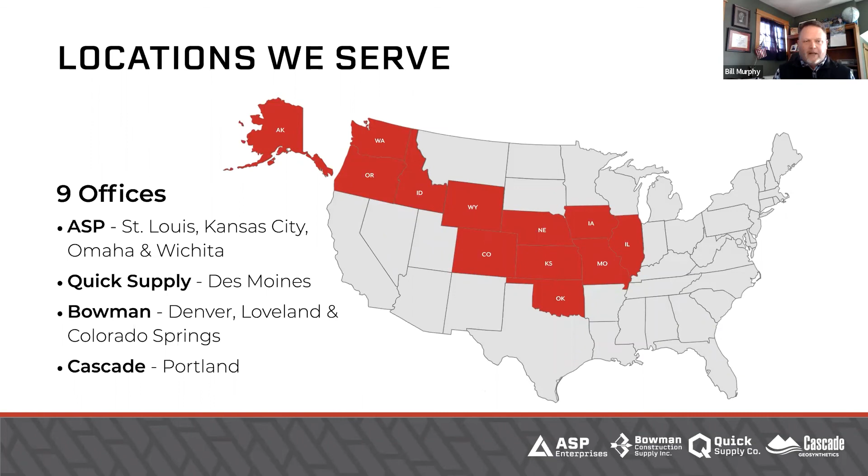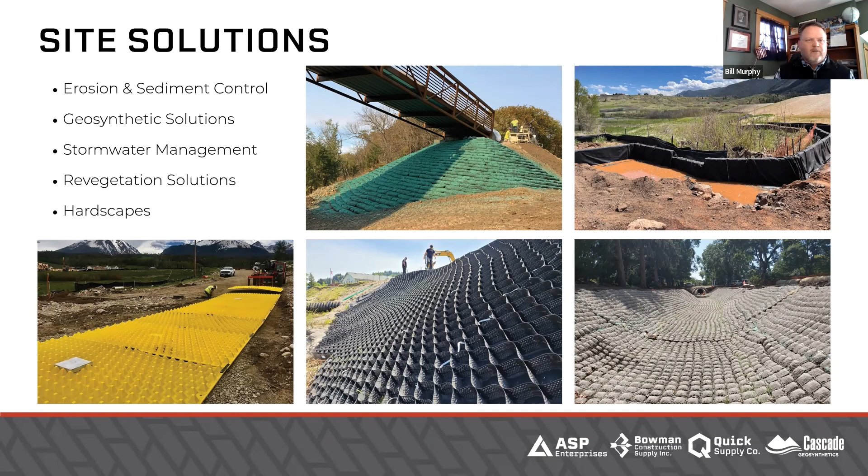We're going to talk about a couple of specific applications today with our guest speaker. But just to remind you folks, if you have questions on any sediment and erosion control, geosynthetics, revegetation, or hardscapes in some of our locations, just give us a call. If we don't have it, we'll point you to somebody who does. We're very good at advice, whether it benefits us that day or not.

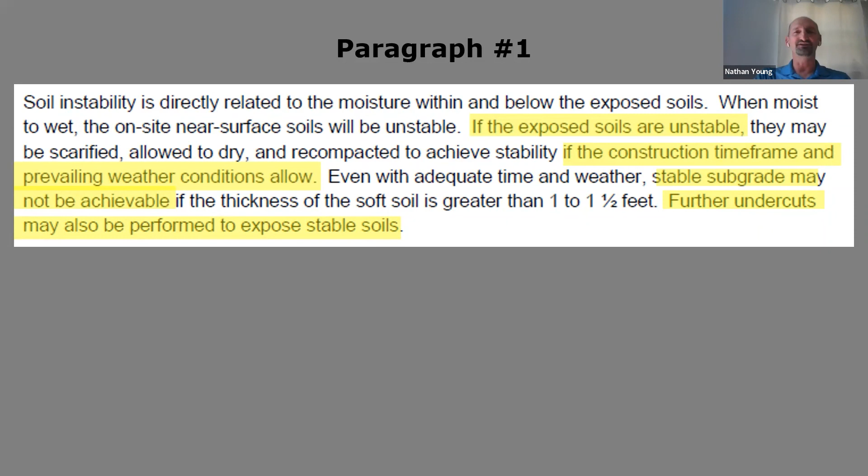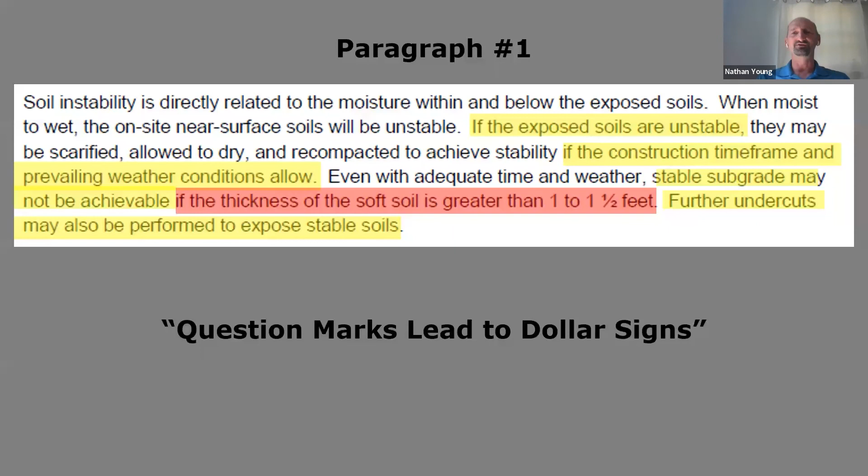I'll break it down by paragraph. If you look at paragraph 1, there's a lot of 'if' - if the exposed soils are unstable, if the construction time... again, that's 'if.' Stable subgrade may not be achievable. Further undercuts may also be performed. So you can see here, there's a lot of uncertainty just in this paragraph alone. And I was told a long time ago that question marks lead to dollar signs - you've probably all heard that, but there are a lot of question marks in this. And then they also throw in this: if the thickness of the soft soil is greater than 1 to 1.5 foot - again, a lot of question marks in that paragraph.

Moving to paragraph 2, for budgeting purposes - and when this is in a report, a lot of times there's a lot of, I don't know if this is a word, but conservativity.

Generally, you get a conservative approach whenever they're asked to provide budgeting purposes. And then the third paragraph, you look here, more detailed recommendations can be provided during construction. And we need to keep the end user in mind when we're looking at these geotech reports.

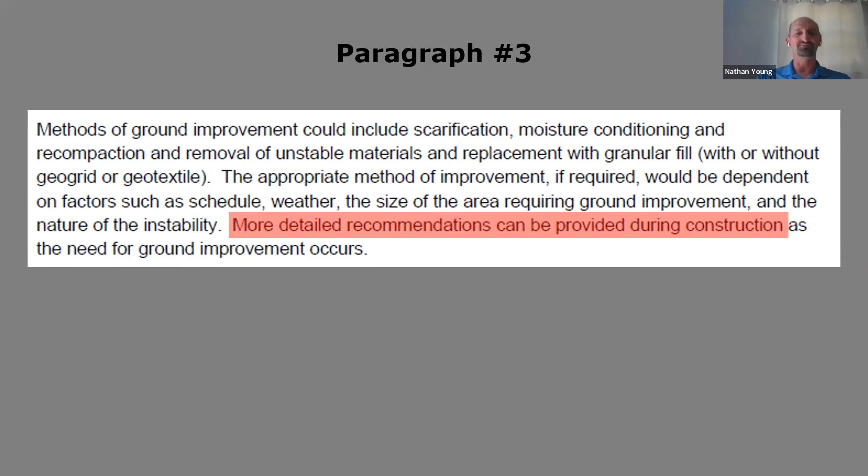Moving on, I blacked out this section because it identifies the company, but here they throw out 2.5 foot undercut depth, bridging lift 24 inches or more. And then this one's a tricky one. The thickness of the bridging lift will depend on site conditions at the time of site grading. So I just quickly broke down that paragraph, and there's some questions.

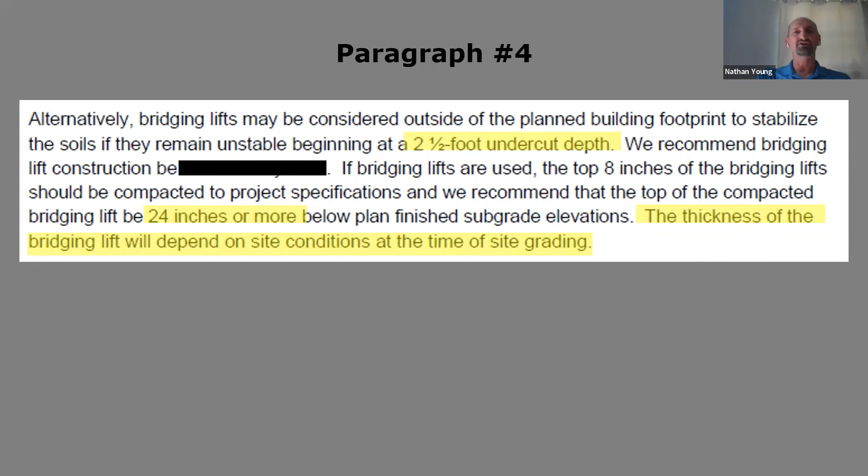First off, how does a contractor bid this project or even provide a budget number with this information? A lot of times you get a conservative budget number, just like the Geotech in this report put out there. They're probably looking at 5 foot undercut. What happens if less undercut is necessary or more undercut is necessary? Well, then it becomes, many of you have seen it, a finger pointing session in the field.

You have either your testing lab, they'll look at it from station to station and come up with a thickness. Well, usually that guy's sitting there with somebody looking over his shoulder, making sure you got it right. Or you have to spend money for a surveyor to come out and shoot actual grades and then put that into a computer program model.

And this one, I never understood this, and this is why it led me to Tensar. I've been designing with Tensar products for over 15 years now, but how do you allow for the benefit of a bridging lift when it comes to supporting the design traffic? In other words, if you have a 2 foot thick lift of bridging material, how many more ESALs does that give you when you're looking at the pavement surface? So that's where Geogrid allows you to calculate that with accuracy.

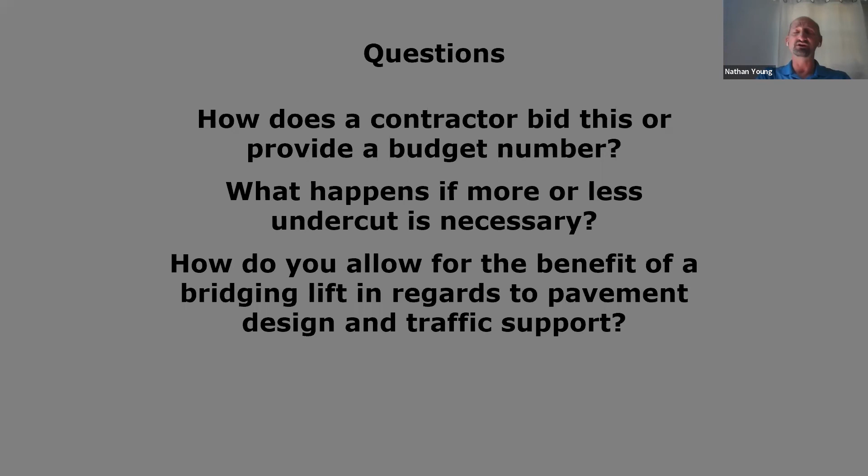Okay, so some of the key terms for today, CBR and subgrade modulus. Basically, those are fancy terms. A lot of you may know them, but it's for the strength of the subgrade. That's the #1 factor for the design input that we look at when we come up with a recommended section. And of course, we'll be talking about primarily Geogrid. And then another key term is performance. Within all families of geosynthetics, whether it's fabric, asphalt reinforcement, Geogrid, there's differing levels of performance within each product.

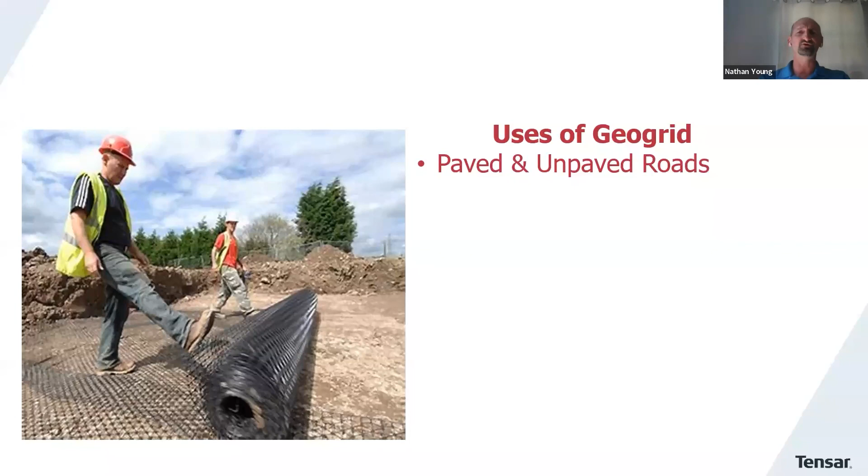So a lot of you probably know these uses of Geogrid, but I'll just run through them real quick. Paved and unpaved roads, access or haul roads. Maybe you just need to get out to the site to be able to build it, and it may be a temporary haul road. Shallow utility cover, in a lot of areas we're seeing a lot of sprawl. So we're going into areas where we have old buildings and we're demoing the buildings. Well, then you have a spider web of shallow utilities. So it allows you to not have to undercut or reroute utilities.

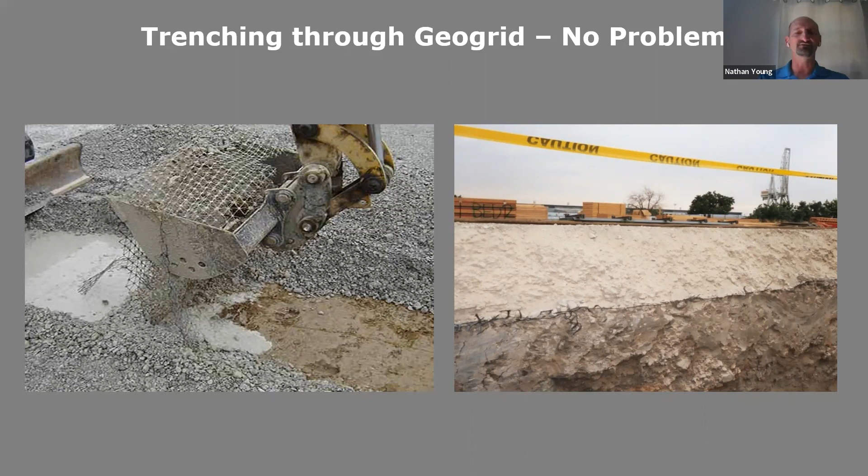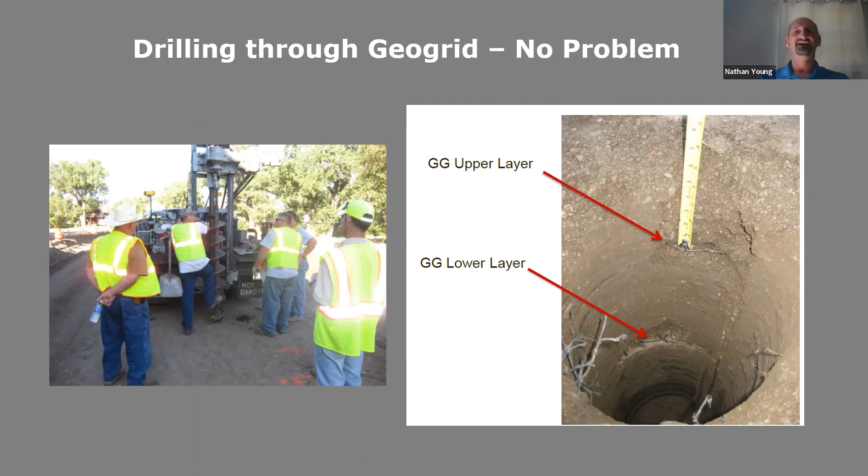Which leads me to the most common question that I'm asked: well, what if we have the grid down? What do we do? Well, you can trench right through it. You don't need any special heavy equipment or to remove some of the gravel and hand cut it. You just take your backhoe or track hoe and just excavate through the grid. And you can actually drill through it. We partner with GeoPier on a lot of projects where they just need a platform to drill through and install their GeoPier system. And you can actually drill through our grid as well.

So moving on, soft soil conditions, which is the reason Geogrid was invented originally back in the late 60s and 70s. We have a lot of rail applications, working platforms if it's a crane platform, bridge abutments. We have walls and slopes, reinforced slopes, and all of these above.

Tensar has people in place such as me. That's what we're here to do, is to help you come up with a design recommendation, whether it's before construction or during construction, and we can help you out with that. And then the number one reason for geogrid is to generate some construction cost and time savings.

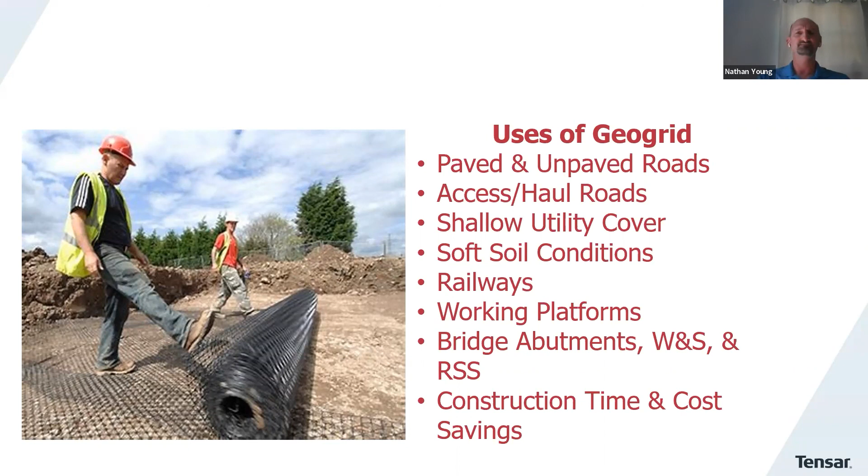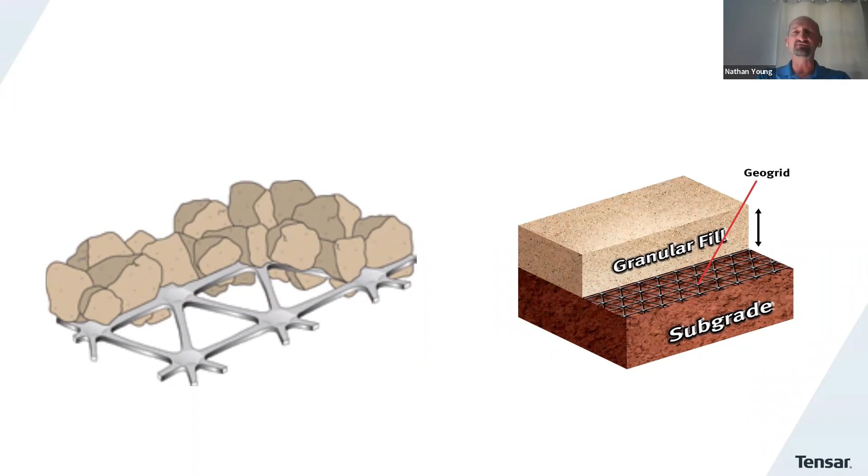And just basically how it works, the aggregate or the rock sticks through the openings in the grid, which puts the grid into tension and distributes the load over a soft subgrade. And it's placed on the subgrade. The subgrade has to be relatively flat. It doesn't need to be perfectly rolled. Any track hoe operator, while you're doing your clearing and grubbing, can get it flat enough for our purposes.

So I mentioned performance as one of the key terms for today. And in order to discuss performance, I think the easiest way is to go through the history of geogrid and the performance of geogrids. The geogrids I'll talk about, Tensar's grids, are all made in the USA. They're down in Morrow, Georgia, just outside of Atlanta.

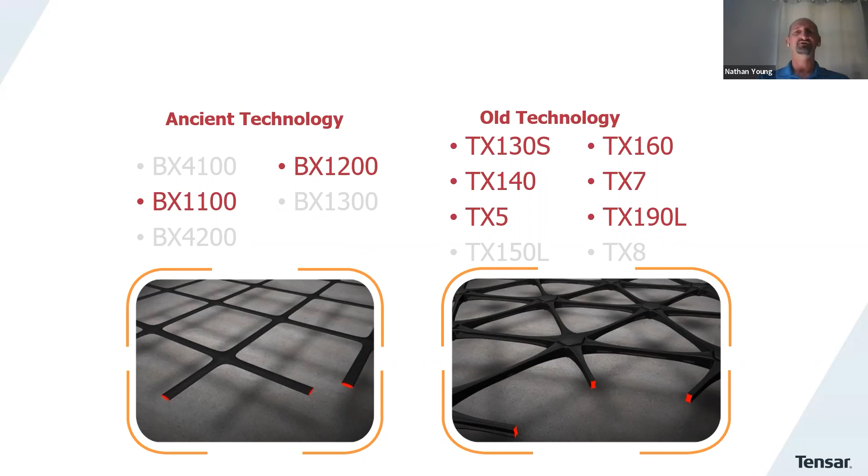So I have on the left-hand side ancient technology, I call it, and then on the right-hand side, now old technology. And the ones in red are kind of the go-to. So in the ancient technology, these are the biaxial geogrids, the BX1100, BX1200. And then what I'm calling old technology are the triaxial geogrids. And as you can see, those are kind of the go-tos, the ones highlighted in red.

And the difference between the two: the biaxial geogrids, referred to as biax, were developed to distribute loads, and because of the alignment of the apertures and the nodes, they transfer loads linearly. Whereas triaxial geogrids, you put a group of triangles together, 6 triangles create a hexagon, which allows you to distribute loads radially in a 360-degree pattern.

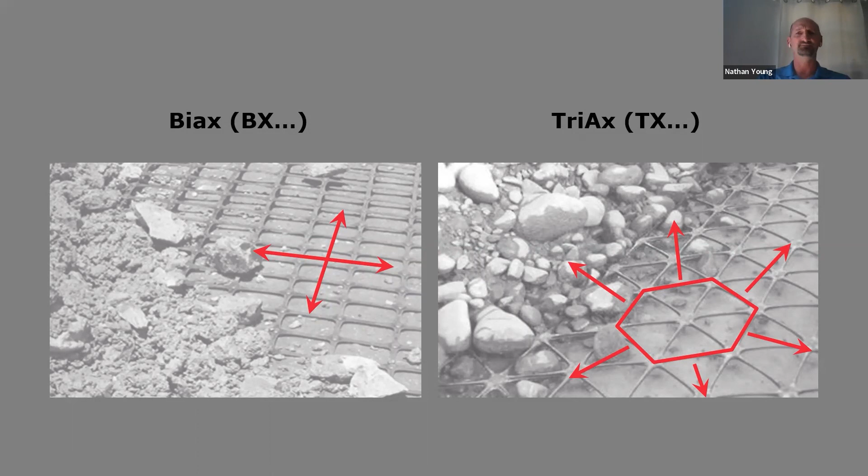Oh, and I forgot I have a sample here. Before we move on, this is the triaxial geogrid. Many of you may have seen it, polypropylene. And again, the 6 triangles create the hexagon. And also to be noted, there are 2 additional legs to each node as opposed to biaxial grid.

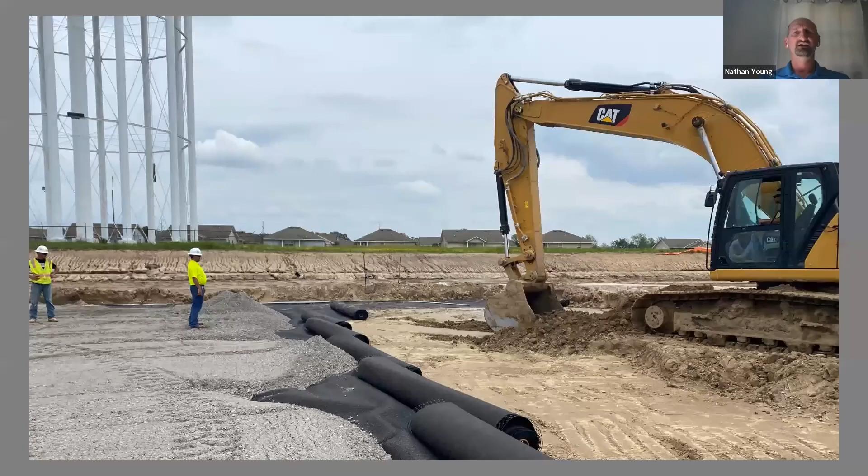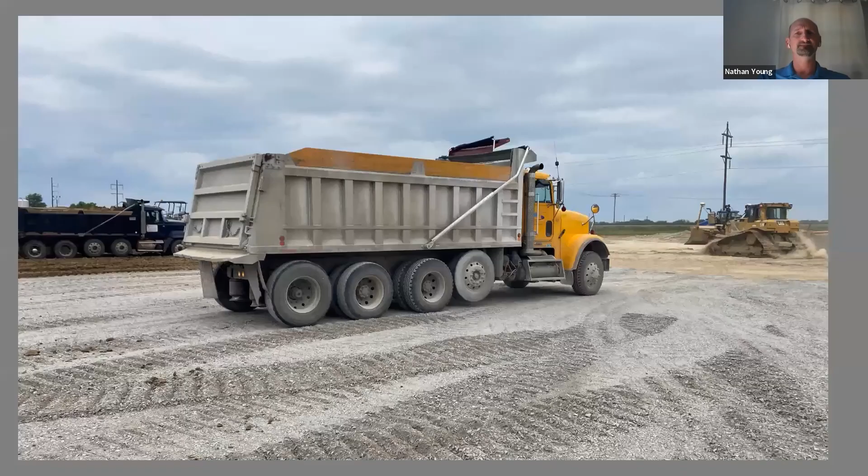And here you can see the rolls; it looks just like a geotextile fabric. Contractors like this because it's one application. You don't have to carry around the heavy rolls of fabric with a skid steer or track hoe. One person on each end of this roll, you can lift it, place it, and then kick it out and install your gravel. And here you can see we were able to build on it.

And then the newest is InterAx geogrid. We saw that the hexagon shape really worked well, and from what I understand, there were nearly 100 different iterations of this grid. But we have a floating hexagon, which is just a little bit thinner than the outer hexagon. It allows for a broader spectrum of aggregate sizes. Like the triaxial geogrid, we have anywhere from TX130 to TX190, and the difference in those is primarily the shape of the opening to accommodate different aggregate sizes, whereas InterAx has a broader range.

And this is the InterAx, and I'm hoping you can see here, it has a white outer coating and the standard polypropylene black on the inside. And the reason for that is the white coating, if you push hard enough and you have a hard enough thumbnail, you can slightly indent this white coating. And this is co-extruded, so it's not going to separate.

But what that does is it allows for more of a locked-in, mechanically stabilized rock layer. So you're looking at performance. The spectrum is from left to right here. Left is unstabilized, which is before we had any geogrid. Then we have the biaxial geogrid that was invented in the late 70s, but 84 is when we really started honing in on our design methodologies. Triaxial geogrid was in 07, and then our InterAx is in 21.

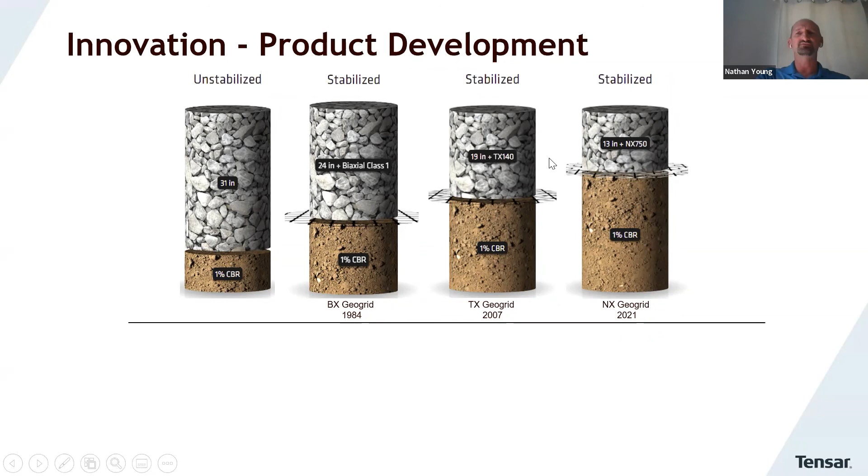So if you look at it as far as communications, back before we had grid, we had the carrier pigeon. And I like to call this, in 84, the Zach Morris phone came out, and that'll age a lot of folks, but Saved by the Bell, Zach Morris, he was cool because he had this big old brick phone.

My wife will get a kick out of that one. I'll have to let her know.

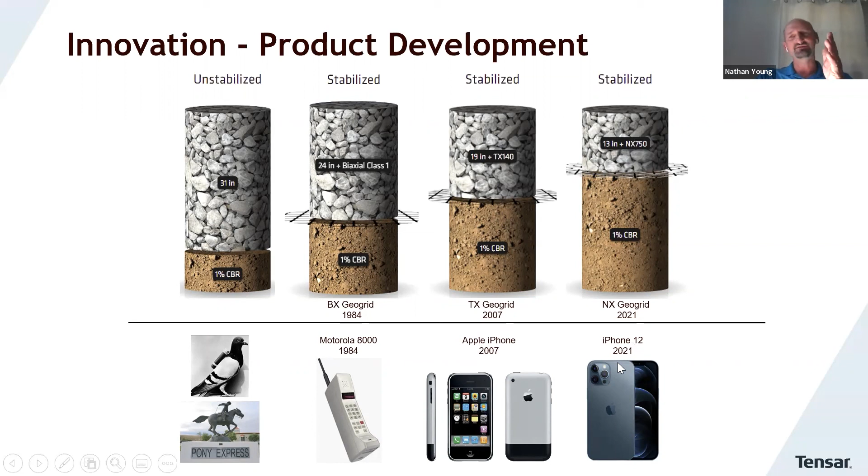Yeah. And then in 07, Apple came out with the iPhone, which I swore would not fly because I knew I would probably break the screen. But here we all, 90% of people have iPhones. And then in 21, we had the iPhone 12 come out. So that kind of aligns it with the technology of communications.

A couple of public service announcements, I call this my public service announcement section. I see this a lot in Kansas and Missouri, where there's highway plans that come out and they just say geogrid. And whenever I call the designer, I ask them, what were we doing here? What type of grid, and what was your approach? Well, they say, we have a qualified products list or an approved products list, and they pick the geogrid off of that.

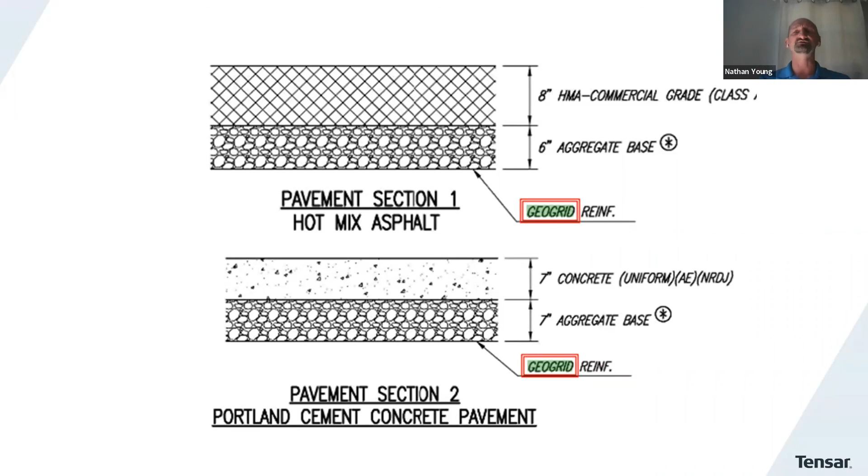Well, most of the time when you're bidding a job, the contractors, in order to get a competitive advantage, will pick the cheapest geogrid. Well, that also means that it's the lowest performing geogrid. So they say, well, we're stuck with that or-equal clause.

Well, back in 2019, FHWA stepped out and said, we're going to allow you to spec proprietary products. In other words, in your plans, you can call out InterAx NX850 or whatever the case may be. And then beyond that, back in 74, there's a court case where they wanted to allow for specing proprietary products. Well, I was actually at a presentation when this came up, and I don't know the date, but apparently several weeks ago, it's fairly recent, the Supreme Court actually backed that up. So at the highest level, it is actually allowed.

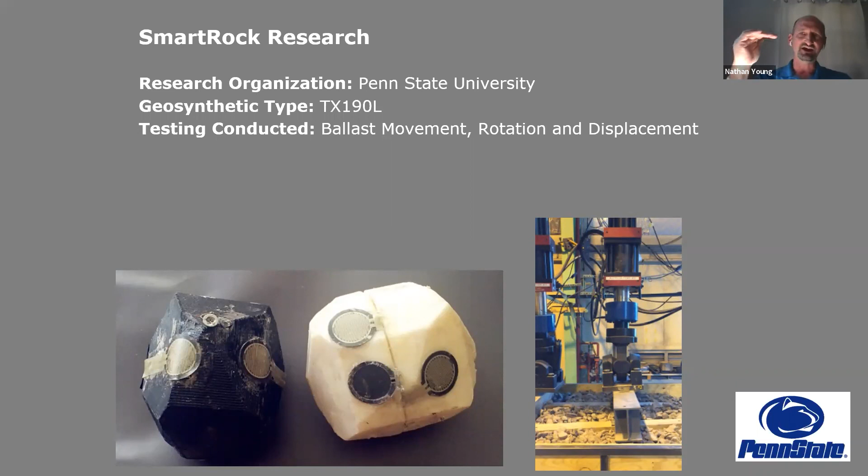And just to give you an idea on the level of research, this was a smart rock. We partnered with Penn State in developing this smart rock. Basically, it was put in the middle of a railroad ballast, and it would record the rotation and the movement of that smart rock within that section as trains would go over the rail.

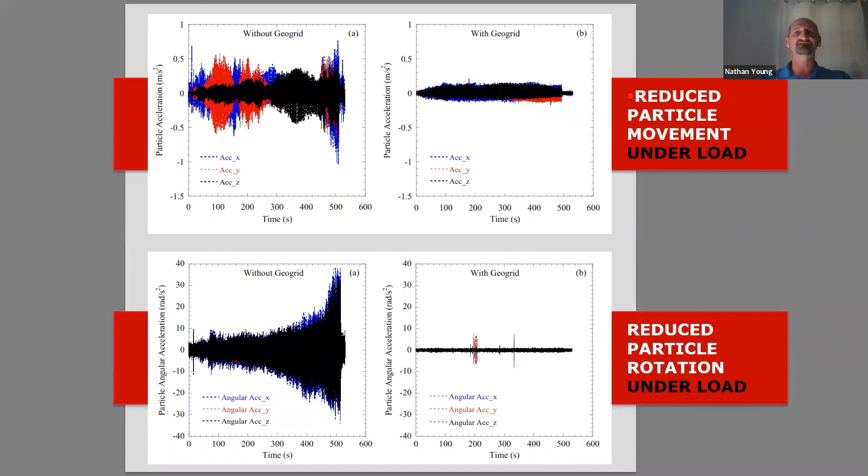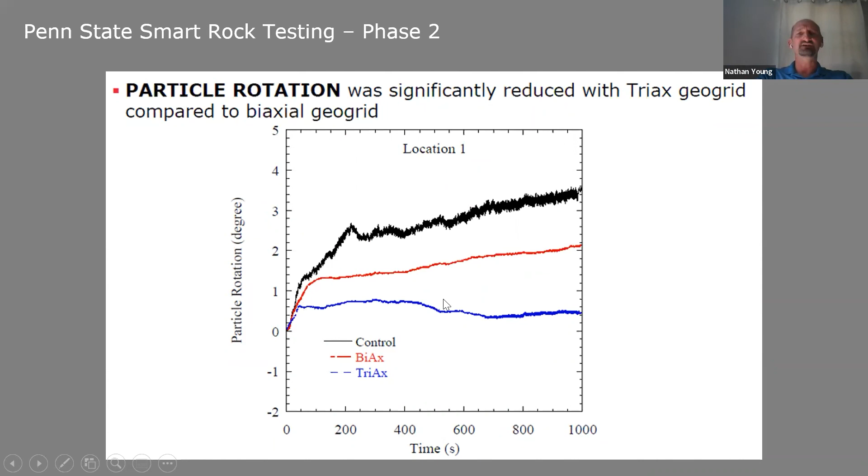Here's the output. You're able to see the particle movement vertically, and the bottom one is rotationally. On the left-hand side is without geogrid and on the right-hand side with geogrid. So basically, you can see it mechanically stabilizes that rock and locks that section in tighter. And this goes back to the performance. You can see without geogrid, you get quite a bit of rotation. With the biaxial grid, quite a bit less, and then triaxial even less than that. So that kind of stuff is on our website.

You can nerd out if you want. Plenty of information there for you. So we're looking at the two primary applications for geogrids.

First off is, and I'm looking at myself in the camera, and I'm not in a dark room. It's just, unfortunately, we're remodeling my office, and I had to move to this room, so I apologize.

But the first application is subgrade stabilization, and that's simply soft subgrade. This is a book. I actually found this in our attic. We used to read this to our boys, and it's a silly book. It's about these dogs who are driving this bone truck, and it gets stuck, and that's what the whole book's about. It's a silly book, but we all deal with silly people day to day. And of course, some of them are these drivers, they don't quite pay attention.

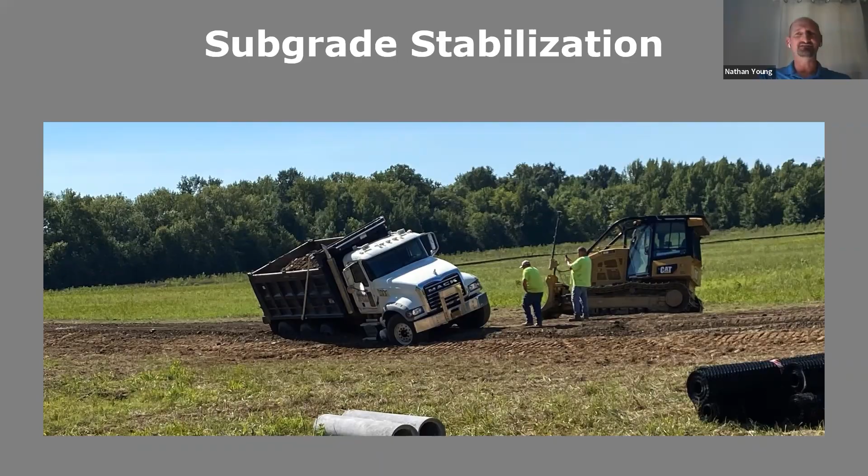And this is a good representation of soft subgrade and also stabilized subgrade. This is actually a bike trail where they just needed to get it stable enough to where they could place asphalt. And they had been hauling hundreds of loads backing down this trail, and this particular driver just wasn't quite paying attention. So once we got everything stabilized, we were able to place our asphalt and compact it, and it's being used now.

So the number one thing to consider, like I mentioned, is subgrade strength. I actually put a little deal on our blog, and Geosynthetics magazine actually published it. Surprised me. I just happened to see it. I don't mind it, but they didn't call me and say, hey, we're looking at publishing your blog.

But basically, what I do in this blog is break down the different ways of evaluating subgrade. And you have a Geotech report. You may or may not have a Geotech report, but that's one tool. The other tool is during construction, you can proof roll or use a probe rod, which a lot of people have heard them call poking it with a stick to see how firm your subgrade is. And those are fine and dandy, but really what you need is something to design to.

And that's where the dynamic cone penetrometer allows you to do that. You can see here the picture. It's basically a hammer of a known weight, raised and dropped a known height with a rod tip that is calibrated, and it's quick. Actually, after we're through here, I'm going to a job site to do the same thing, and it can take half an hour to get a lot of information on a particular area.

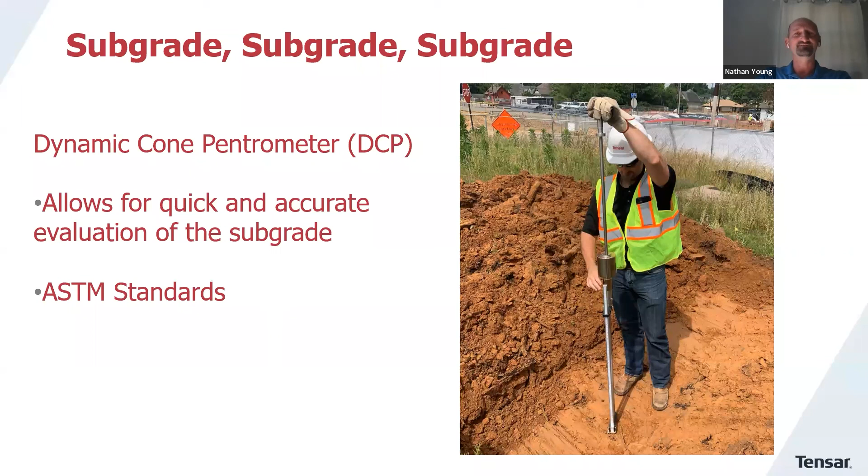It's per ASTM standard. There's nobody that's making money just to have you buy my product type deal. Mine's Kessler, and it's per ASTM standard, and it gives you the modulus and CBR values that we need to come up with an accurate design for stabilizing the subgrade.

Can I interrupt here just for a second? Absolutely. You mentioned earlier about nerding out. Man, I'm geeking out on this. So I first used these in college back in the early 90s at Iowa State University. And then after that, I've used it just a couple of times with different folks like yourself who are reps or some geotechs. But our company has them.

Mark Sternman, I should have asked him to join us. Mark, I think you may be the one that trained him how to use one of these out of St. Louis, but he did a presentation for our company a couple of years ago about it. And then I think Ryan Anderson in Colorado has one now too.

But we keep ours in a nice, expensive travel case. Looks like we're carrying a bow and arrow or a nice high power rifle. But we keep these in the back of the truck. They travel in a case. We take good care of them. But if we're not available, are you or somebody like you in one of your other states that we deal with available to help us with this?

We are. In fact, Mark and I have a good working relationship in that a lot of times you need information right now. I may be tied up. Mark has on several occasions gone out and provided DCP testing, gave me the data, I broke it down and provided the design. Then there's sometimes when I'm available, and I carry this in my truck 100% of the time.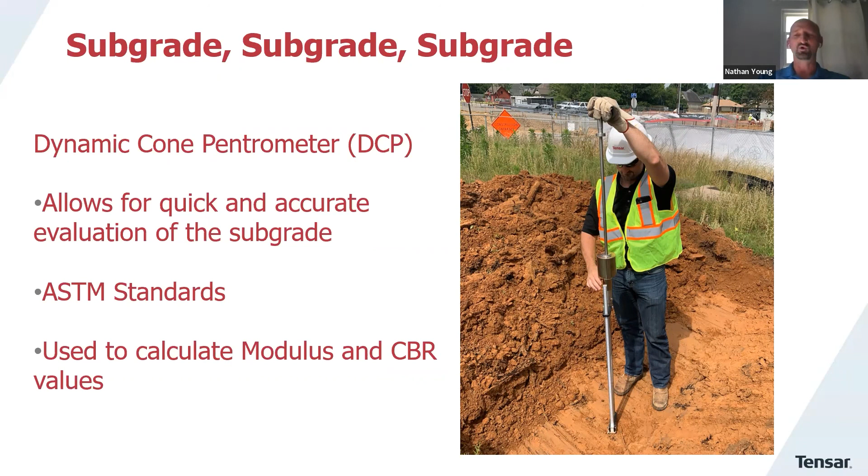I have a toolbox, and it's such a useful tool that I'll go and do testing, and we don't charge anything to evaluate subgrade. More than anything, as a licensed engineer, I like that warm, fuzzy feeling that engineers like to have when you have all the data that you can gather in making a recommendation. So yeah, I actually just replaced my drive rod today. Finally had a warm day where I could go out and replace it, because I had worn it out, rounded off the threads on it.

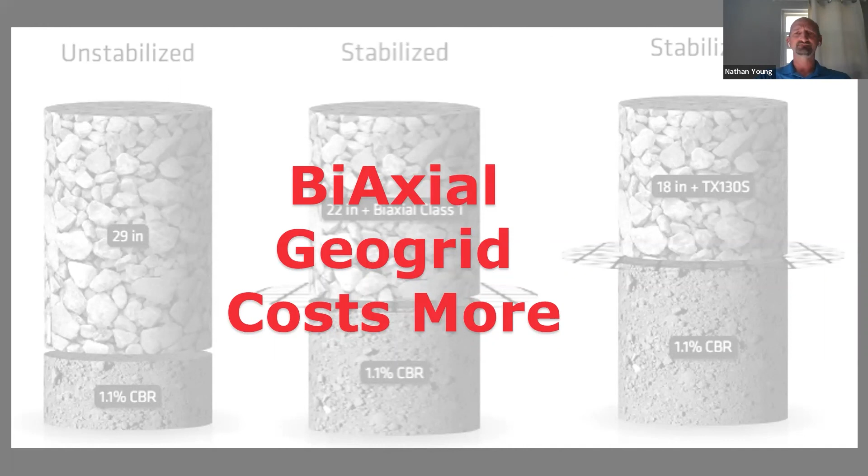So some of the frequently asked questions, one was, can we excavate through Geogrid? This is another one. Well, why don't we use this biaxial Geogrid? It's cheaper. Well, it is on the front end as far as the cost of the grid, but if you look at it as a system, it actually costs more. And we'll go through a little exercise here just to put dollar values to it.

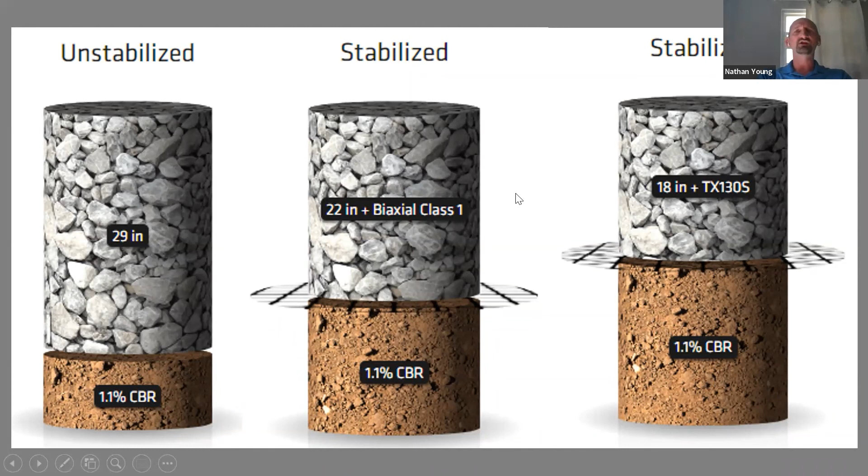Here you can see we have an unstabilized section and a section stabilized with biaxial Geogrid. And for a CBR value of 1.1, as we show here, we're able to reduce 7 inches of gravel. If you look at a TX130, which again, TX130, TX140, they perform about the same. It's the lowest performing triaxial grid. You're able to whittle away 4 more inches of gravel.

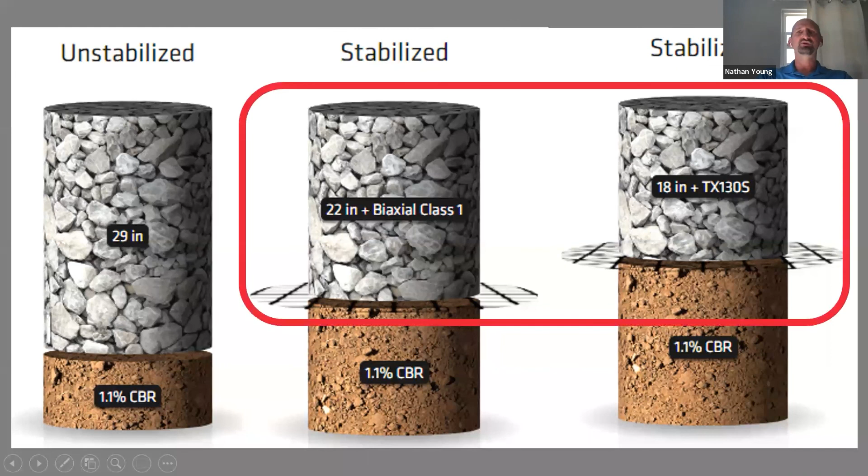So if we compare just the TX with the BX, this is a nifty little card. When I present to contractors, everybody kind of piques their interest and I end up giving it out. If you want a copy of this, it's on our website, or I'll be more than happy to send it.

But this is based on aggregate cost per ton. Right now, $25 for my region is kind of the number I'm hearing. St. Louis, you do have more access to aggregate. It's cheaper. And then, of course, in Western Kansas, it's more expensive. But $25 is kind of what I use as a rule of thumb. So we were able to save 4 inches of gravel, and that's on the vertical axis. That's the thickness of the gravel section from 1 to 15.

So if we look at 4 inches in savings, we're saving $5 a square yard by going from a biaxial grid to triaxial grid because of that performance difference. Now, of course, there's a cost of that grid, and just as a conservative number, you can say, all right, this TX130 is $2 a square yard, $2.50 even if you want. You're still saving $2.50 a square yard.

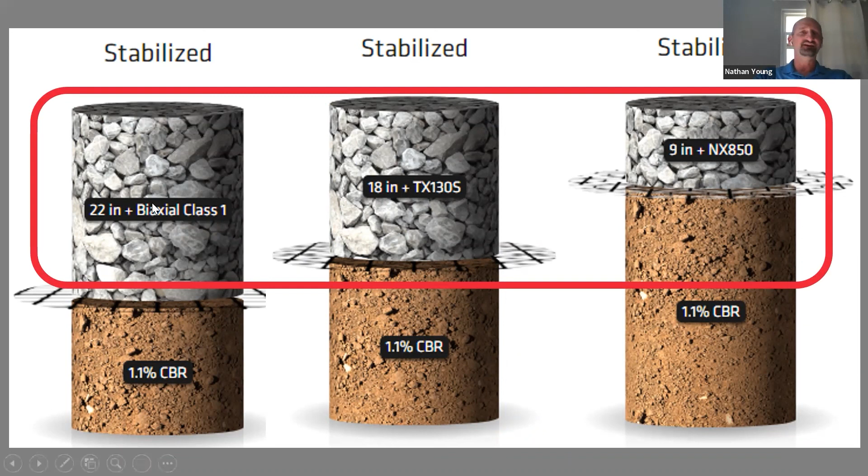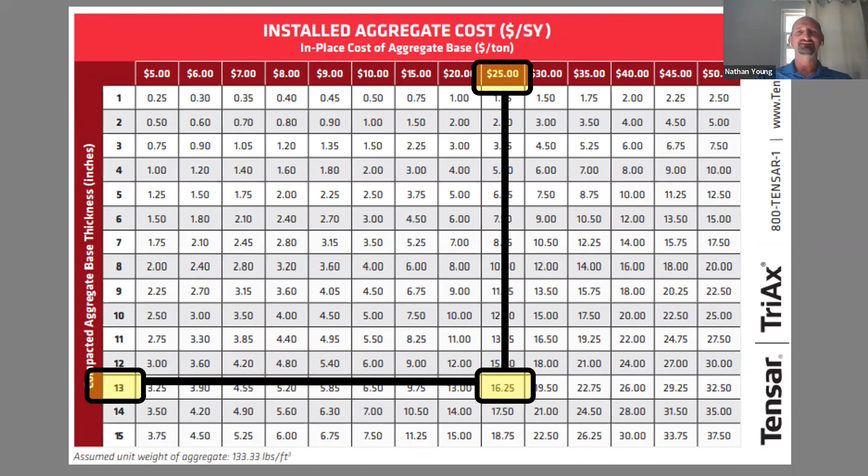Now, if we look at the highest performing, which is our InterAx NX850, right now the highest performing on the market, you compare that, you're actually able to save 13 inches of gravel as compared to biaxial Geogrid, which, going through the same exercise, 13 inches of gravel at $25 a ton is $16.25 a square yard. Well, you may be spending $6 or $7 a square yard for the grid, but it still saves you $9 a square yard. So just in a real quick explanation of why biaxial Geogrid can actually cost more, that's an example.

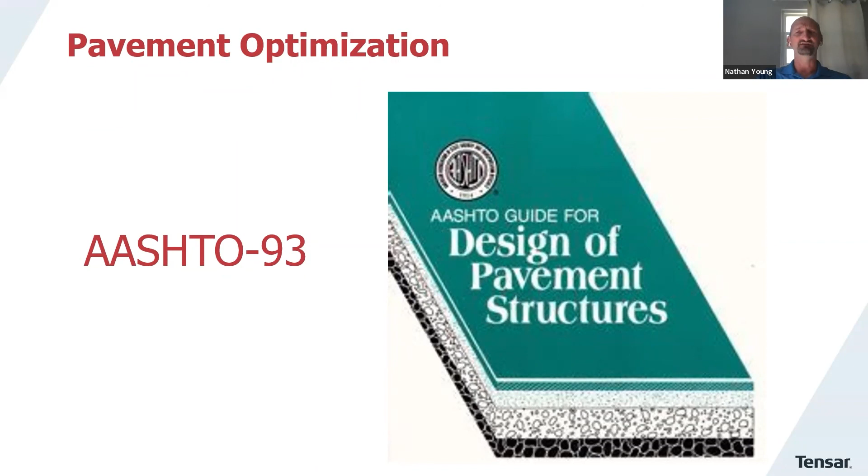The second application is pavement optimization, and that's kind of a nerdy Tensar word for thinning up the asphalt. And AASHTO 93 is the design methodology most engineers use to design pavement sections, and that's what our methodology is based on as well. And our Paved software, some of you may remember our old Paved software. We now have a web-based program. It's called Tensar Plus, and it's taken Paved, it's taken Rail, it's taken all these different applications and put them into one.

It's web-based. It used to frustrate me before I came to Tensar, where I'd go in to do a design and I'd have to reload or upload Paved. Well, now since it's web-based, it updates overnight while you're sleeping, so you don't have to mess with that. And there's all kinds of applications going out through Tensar Plus.

So if you're interested, for people like me who haven't used that software as often and might need a refresher, what kind of training is available? And do you guys provide that? We do, and I'd be more than happy to set up any kind of training session. And a lot of times, if you have a project, within about 10, 15 minutes I can run through it and show you. Or we've actually given some design workshop presentations where we'll go through the engineering background of each module, and you can also get PDHs just because it's technical in nature.

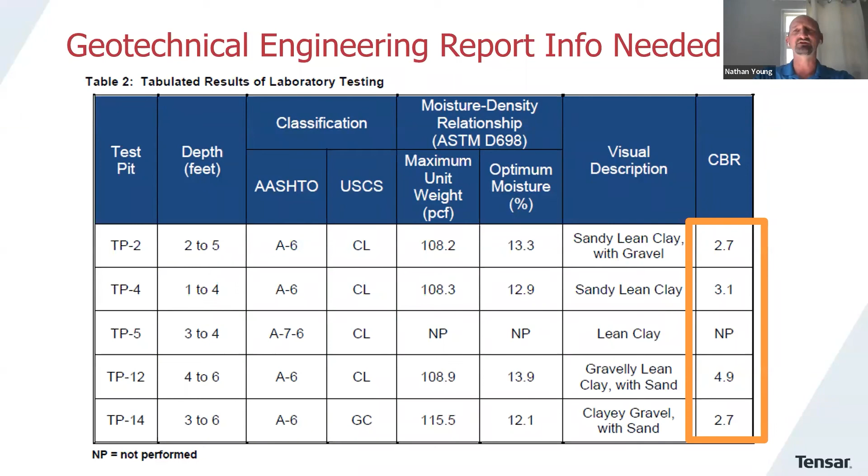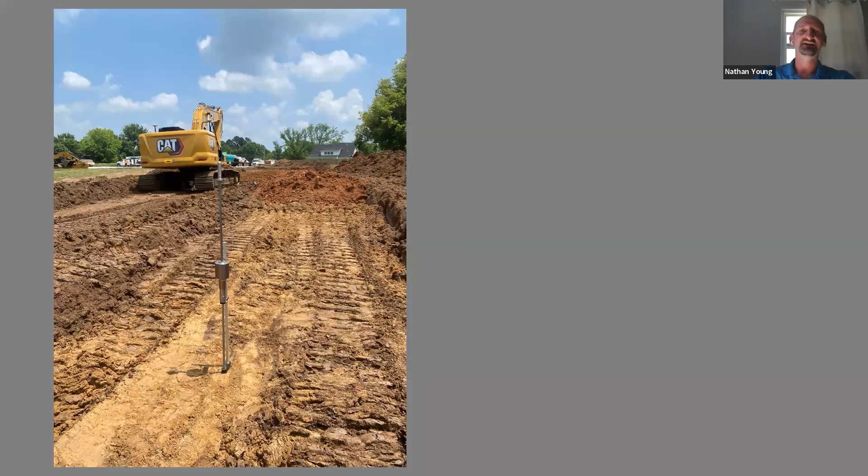You can also obtain CBR data using our software from the drilling, the geotechnical boring logs. But here, on the front end, we had a CBR value, so we gave a recommendation based on the lab tested CBR values. Then I went out when they were ready to construct it, and confirmed that those CBR values were still in play, which in this case they were.

We proof rolled to make sure there weren't any soft spots, and then we laid out the grid. In this case, what it did, this was a win-win-win. Everybody won on this one because the original recommendation was 18 inches of undercut and replace because of the CBRs being in the range of 2 to 3, which the geotechnical engineer had designed the pavements with a higher CBR.

So they were going to have to require 18 inches of undercut and then replace with a higher CBR material. Well, based on my DCP data and the original geotechnical engineer's report, I was able to replace that 18 inches of undercut with a layer of grid. On this project, it was a TX7. The controlling factor was the construction traffic because it was going to influence the subgrade more so than the design traffic. Because of that, I was able to allow for a construction platform for this subdivision with city streets. The city actually was able to realize a higher design traffic ESAL count. ESAL, that's equivalent single axle loads for those of you that aren't familiar with that. So everybody won on this one.

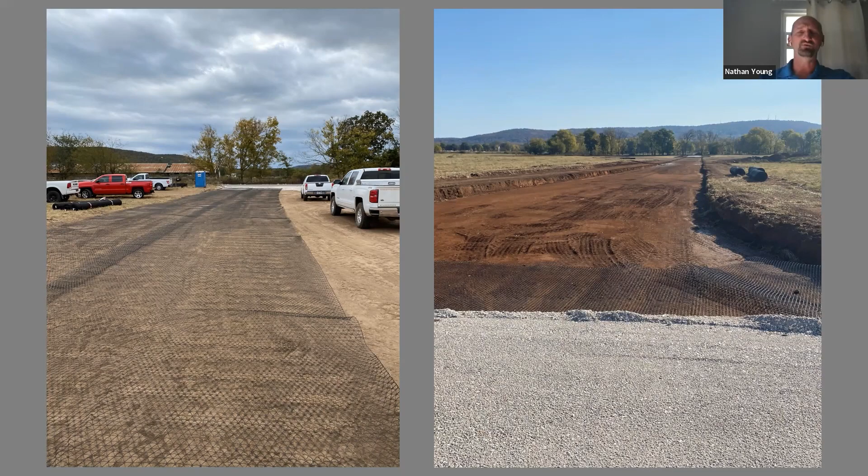And here you can see they haven't installed the utilities yet. Goes back to, well, can we dig through that grid? And the city said, well, I'll believe it when I see it. Here you can see, we have sewer pipe here sitting and storm drainage. I didn't hear a single word from anybody about issues, and I knew there wasn't going to be because I'd seen it so many times.

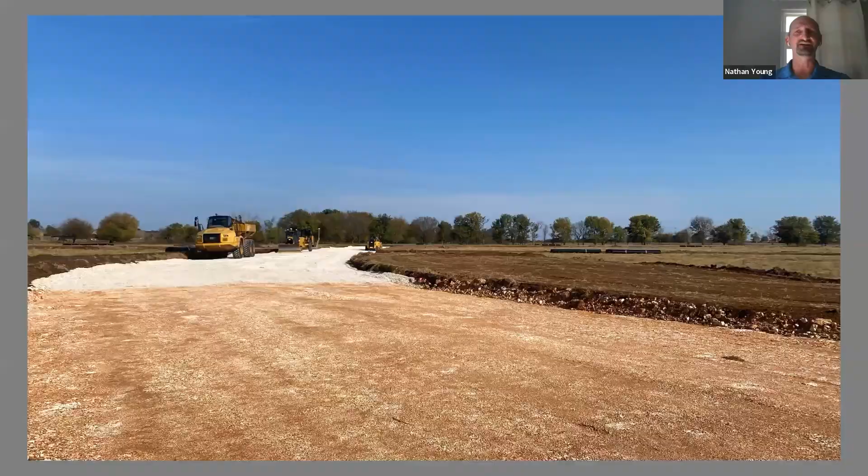Basically what it did, because they had a construction platform and because they did not have to perform that undercut, scrolling through here, the benefits were about 300 grand. This was a 60, 70 acre subdivision, so pretty sizable job. But based on what the contractor told me, they saved about $300,000 in just cost, and they were able to save about 8 weeks of time.

A lot of that savings, this was constructed about this time of year, where we're starting to see a lot of rain. They built into their schedule that when you have rain on an exposed subgrade, you have to just sit back and wait for a few days. Whereas if you're already covered with gravel, the next day after the rain, they were able to go out and continue work installing their utilities.

So now moving on to how the process should not work.

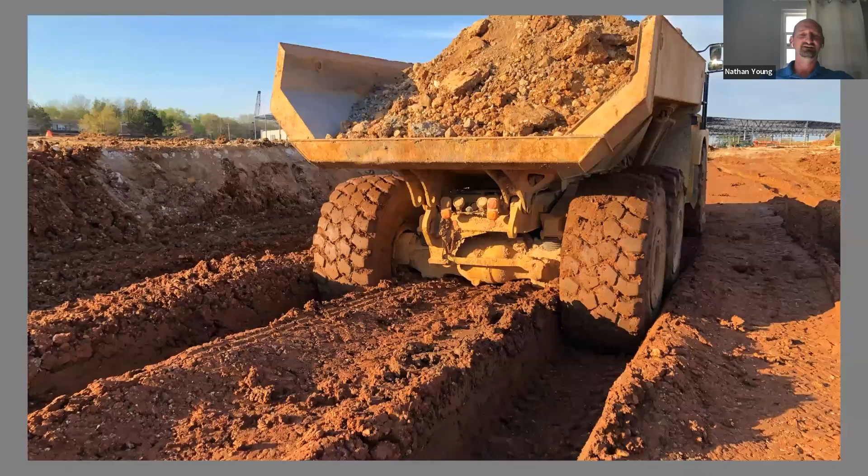This was a project where I had a guy who sent me this picture and said, 'Hey buddy, we're going to use some of your Geogrid on our job.' I said, 'Well, I appreciate that. Tell me a little bit about it.' So this is an off-road hauler stuck to its axles. It's not moving. That's an awesome picture, by the way. The engineer in me loves that picture.

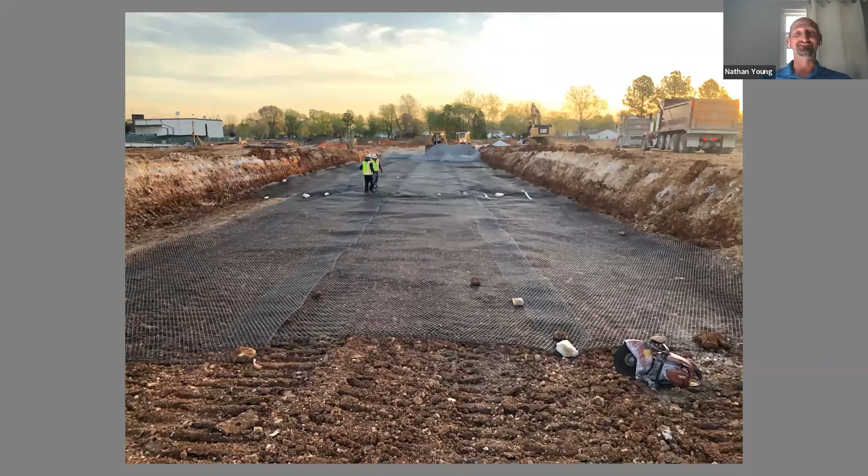Yeah, well, it kind of scared me because this was the next picture I had, and I said, 'Okay, well, tell me about it. What do you recommend?' In the background, the sun's setting, and I told him, 'I'll be out there first thing in the morning because they're about to wrap up.' You can see also in the background they're placing gravel, so they're moving along with a recommendation. So when I asked the question, 'What's your recommendation?'

This was what he said: he assumed a CBR value of 1, so he said that's TX7 with 24 inches of gravel. Well, I said, 'Okay, well, how did you get a CBR of 1?' And he said, 'Well, the truck was stuck.' I said, 'Man, let's go with 12 inches of that 24 and let's see what it's doing. I'll bring my handy dandy tool out. Let's quit shooting from the hip, man.'

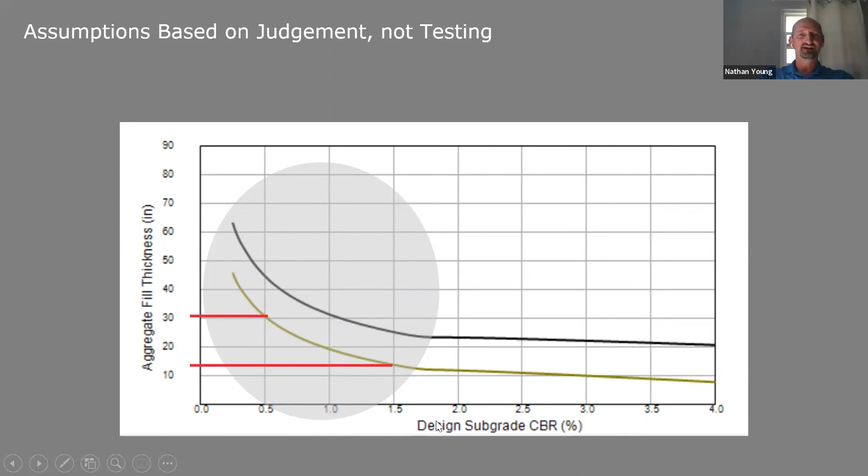So if you look at the difference between a CBR of 0.5 and 1.5, that's about 18 inches of gravel difference. So that's where you really need to be careful.

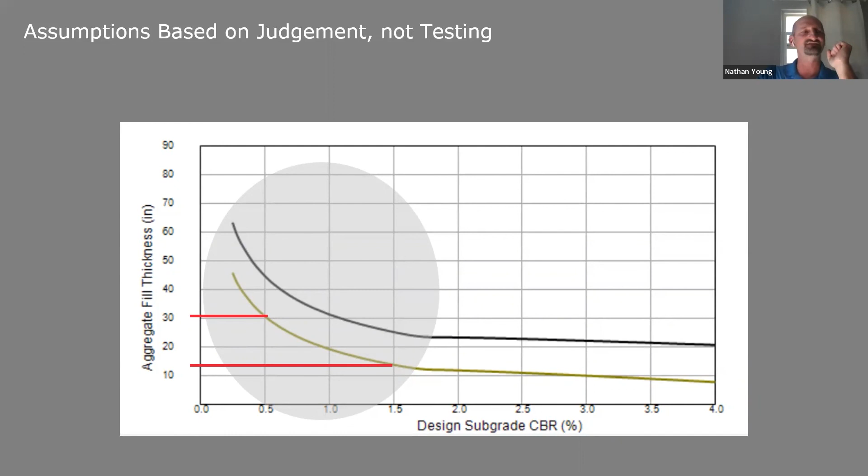I hear a lot of contractors say, 'Well, I've been doing this for 25 years.' We've all heard that, and I respect that, I really do. But I don't think anybody could accurately determine the CBR value within this range. It really takes knowing what's underneath the surface.

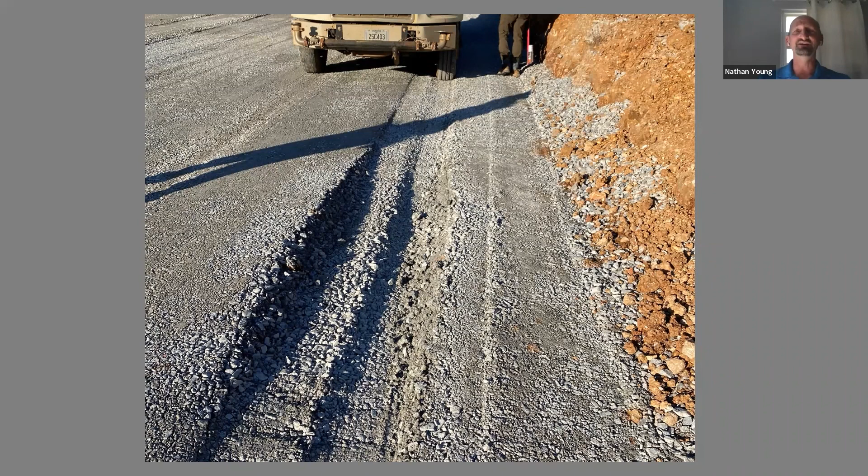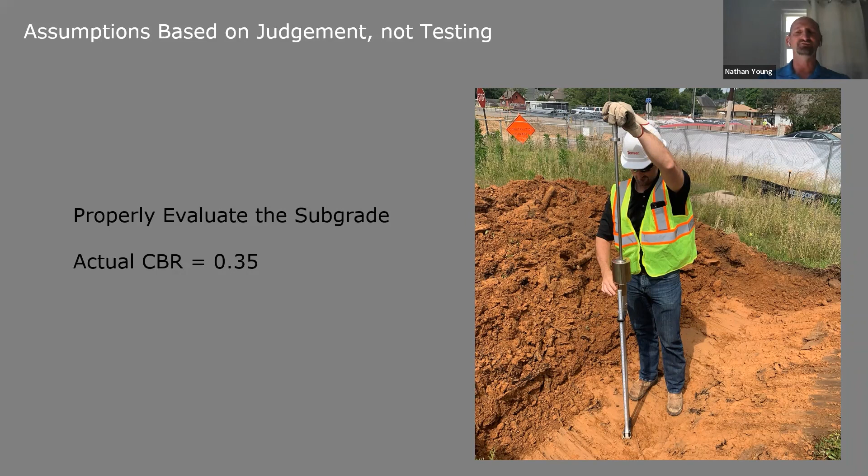And this is what we got. You may remember this picture from the beginning. This is 12 inches of gravel, and based on this, I could tell we need to look at this closer. This really isn't working. So I broke out my DCP, and the actual CBR value was 0.35, and that's a lot different from a CBR value of 1.

So that required a second layer of Geogrid. And actually, when I submitted my design, it required 22 inches of gravel with 2 layers of TX7. So we had 24 inches, so we knew we'd be safe. So that's what we ended up doing.

And I say here, hindsight is 20/20. The engineers looking at this that made the recommendation were thinking, 'Man, I see what you're talking about. Really should have evaluated the subgrade closer.' This is a situation where the owners got hacked, the contractors got hacked, because the recommendation, the change order that went through, didn't work. So they had to allow for another layer of Geogrid.

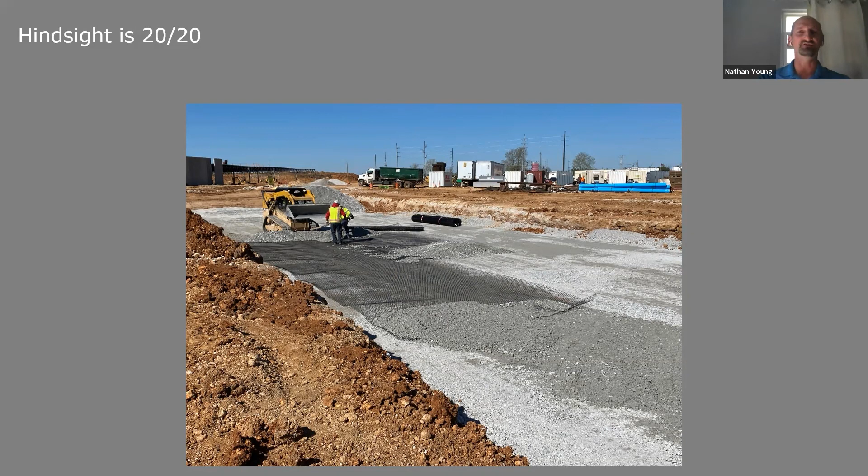Well, no wonder you were scared, because a lot of people underestimate how much of a difference that can make between a half CBR, 1 CBR, and 1.5.

I've seen what you've seen. I was raised by a guy that laid pipe for a living, and I met guys who just stomp their boot heel in the ground and tell me what the CBR was. I was like, man, I appreciate the old school, I really do appreciate a lot of the old ways. But when you're talking about that big of a dollar difference in timing on a project and whether or not it's successful, you're right, nothing beats the data.

Good job out of you.

Yeah, and that's why when we order a Geotech report, even if it's for a parking lot, we don't go 20 or 30 foot, but we need to go 5 or 10 foot below the surface. A lot of that depends on grading, but we need to know there may be a crust out there that's passing a proof roll, and then a couple days into the job, that crust starts breaking down and you start getting trucks stuck.

So a lot of times what's under the surface may be a little scary.

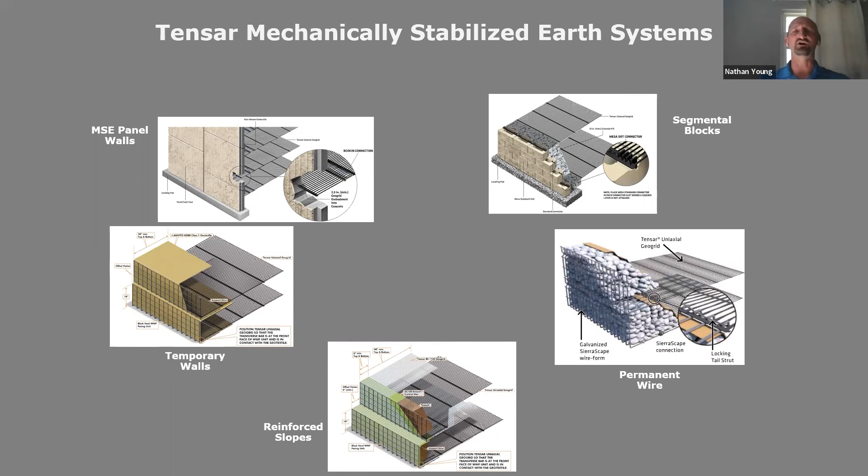We also have asphalt interlayers, which is basically asphalt reinforcement.

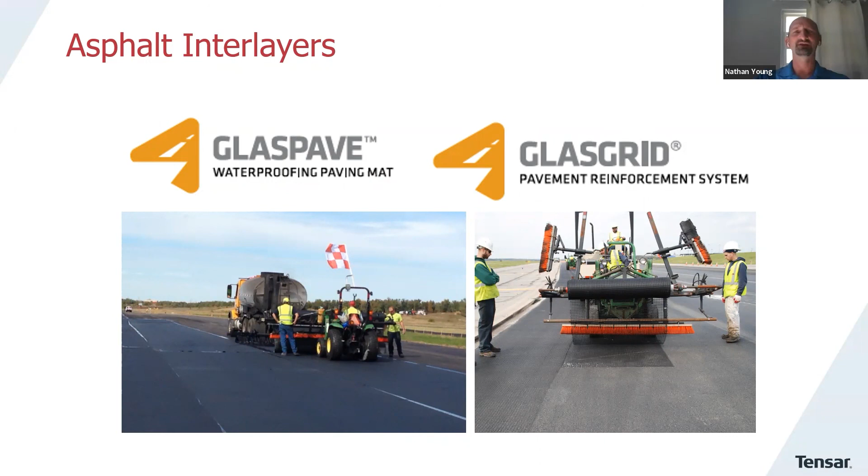This is an example of a project in St. Charles, from last summer. They were having a lot of issues with their pavement, so they wanted to find a way to fix it, since they have a short window of construction for a school, with only 3 months where you don't have a lot of kids on campus. So they really don't have time to do a full depth undercut and replace, and they wanted to come up with a solution to fix and slow down this reflective cracking over the summer.

A contractor placed GlasGrid and paved over the top of it, and this is what it looks like now. Again, this is a year into it, but it basically delays the reflective cracking that you'll see.

The reason Tensar is here, whether it's me or my counterparts in the different regions, if you need a spec, if you're a designer and need a specification for your spec book, we can give you a Word document. If you need site support, site assistance, whatever, that's what we're here for. Basically, if you have an issue, just give me a call or a ring, and I'll be more than happy to help you.